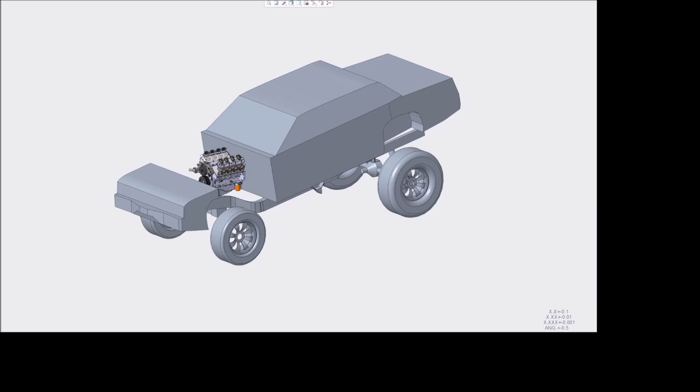Okay, so this is what I have been working on. I've got this 3D model of the Gigapony. Let me go ahead and hide this body here, the front end, so I'll hide the engine too.

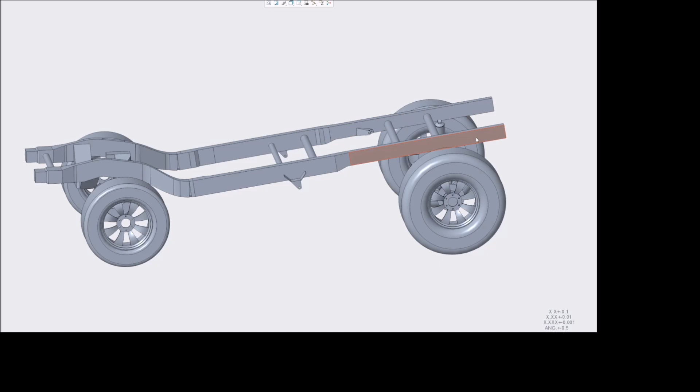So basically what I did, I found the body dimension diagrams, all the technical drawings for Chevy Silverados. I found the frame, modeled it, then copied what I did in real life in that frame modification video. I took out this second S curve and added about 14 inches to the rear end on both sides. So this frame in the model is pretty accurate to what is in my garage right now.

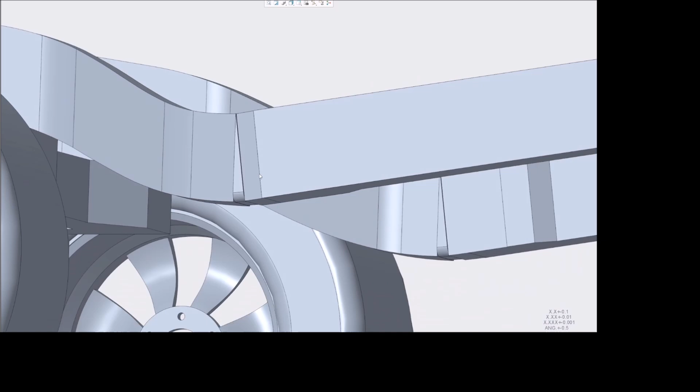The other thing I did was I cut the frame and gave it an 8-degree rake. You can see there's wedges in here. So I gave it its 8-degree rake, and now if we look at it this way, that's a pretty accurate depiction of its final height and rake, everything.

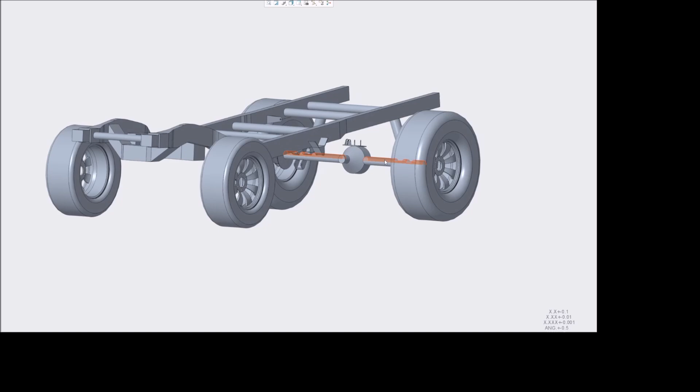Also, with the wheels and tires, those 46-inch tires I got, I did a lot of research on them, looking up people putting 46-inch military tires on Silverados, Fords, Dodges, whatever, and the consensus was don't do it unless you have heavy duty 1-ton axles and super heavy duty brakes. I agree, because that's a lot of weight you're spinning, a lot of stress on the rear end, the differential, the gears, the drive shaft, the transmission, everything. So I opted for 40-inch tires in the rear, which I got a pair of with a lot of tread for only $100.

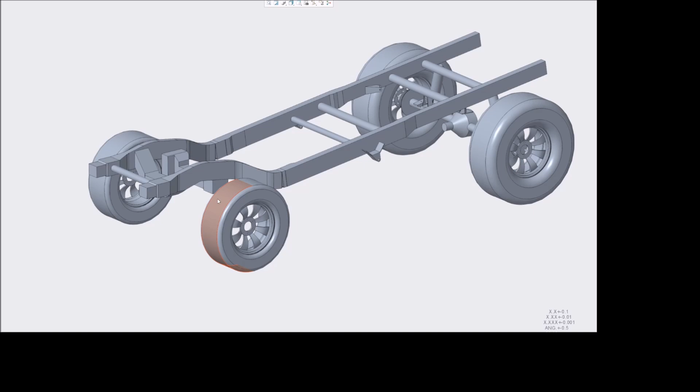And I went with 33s on the front because that's what I found behind a tire shop that said I could go rummage through their tires. I found a pair of 33s for free with a ton of tread left on them. And the wheels are 20s, 20 by 8.5.

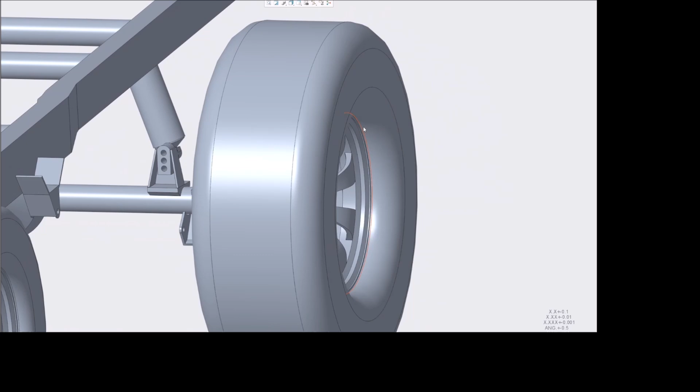You can see I modeled the tires to be representative of what they are in real life. So there's a bit of tire sidewall poking out, I guess, because it's a 20 by 8.5 wheel front and back, and the rear tire is 15.5 wide. The front tire is a 305, I believe. So, cutting it close, but it works. It holds air, the beads sealed just fine.

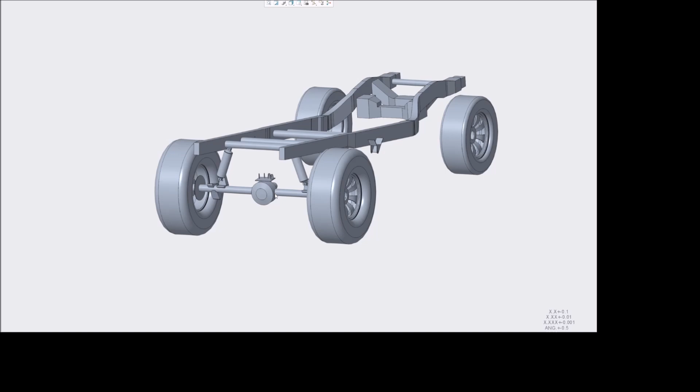I put balancing beads in each wheel, so all the wheels and tires are ready to go. And I've got the rear wheels on the rear end with all new brakes and spacers and everything. If you look, you can see the wheel is not set on the hub or axle - that's because there's a 2-inch gap here to represent a 2-inch spacer.

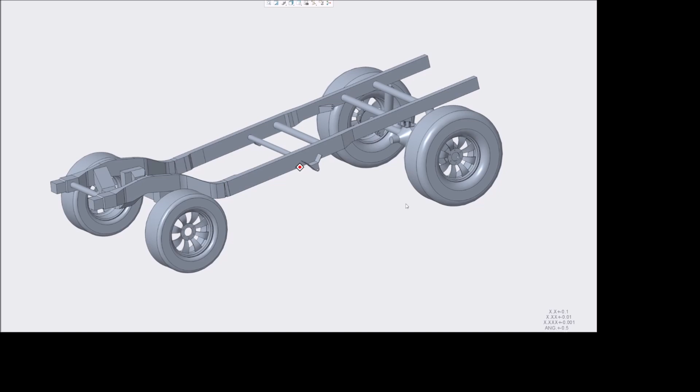So the reason I wanted to do this 3D model, the big reason, is for the rear suspension, one, and two, knowing where the body is going to sit along the frame and what I can expect.

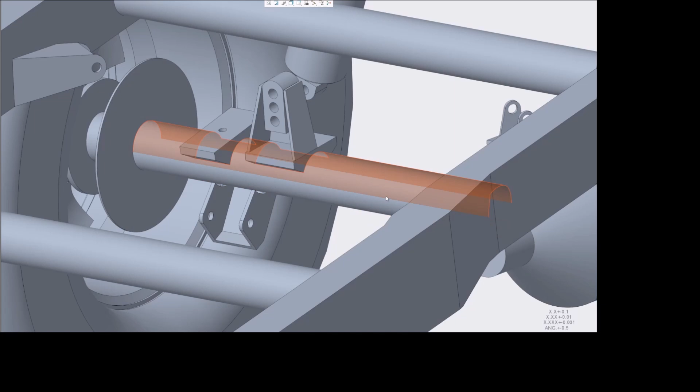So you can see down here on the rear end, I've got a shock tower, which normally welds onto an axle tube with the shock part going down on the backside. What I'm going to do is get one of those parts, which I already have in my shop on the bench, cut it so it's flat, and weld it to this little perch right here, because that would be a perfect spot to put a coilover.

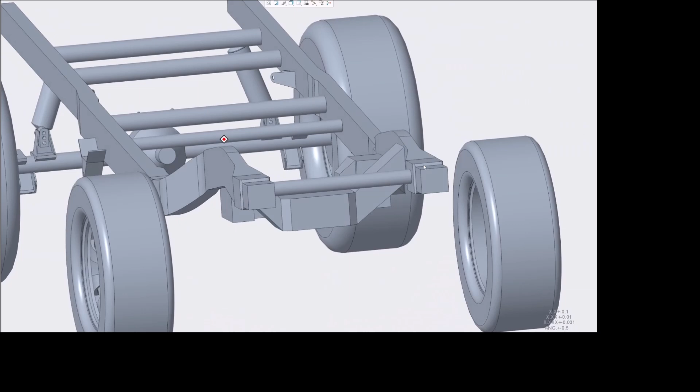All right, so I got that. These parts right here are actually from a company called Barnes 4-Wheel Drive. I found that they have a bunch of different styled and different sized link brackets and whatnot. So I found these - I think they're going to work pretty well.

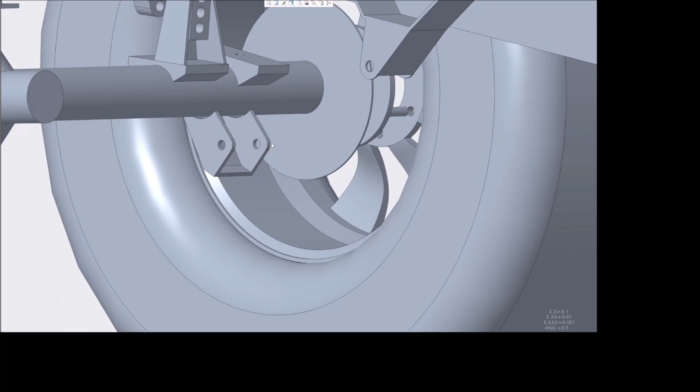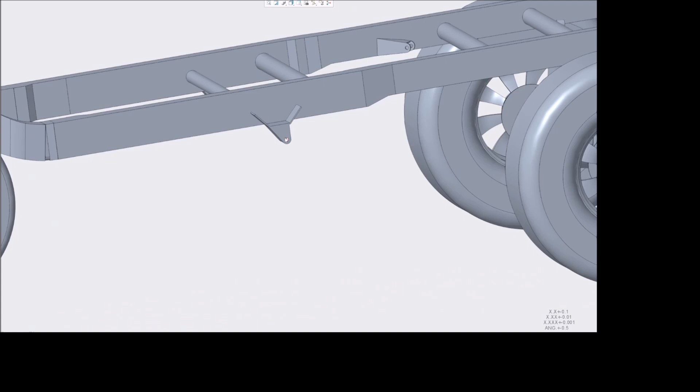Basically, where these brackets uncut should have gone down here, these are going to go. And then from these brackets on the bottom that I was just showing you, I'm going to run a link from it forward to this frame mounted link bracket, and I'll probably beef these brackets up once I get them on - add a triangular gusset in here, and maybe more metal on the top here, something like that.

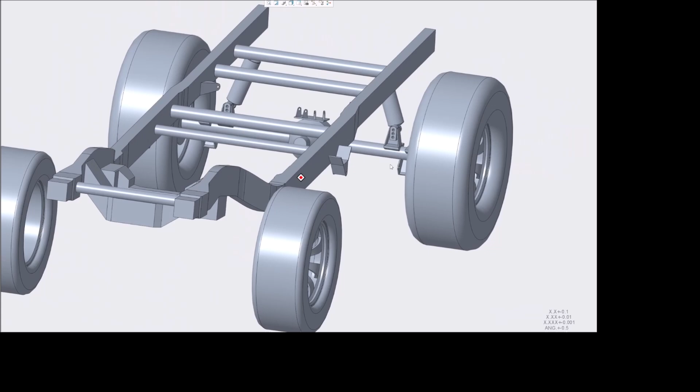And then on the top, these little brackets are also from Barnes 4-wheel drive right here. They're a quarter inch thick. They're, I think, 2 inches from center of the hole to here.

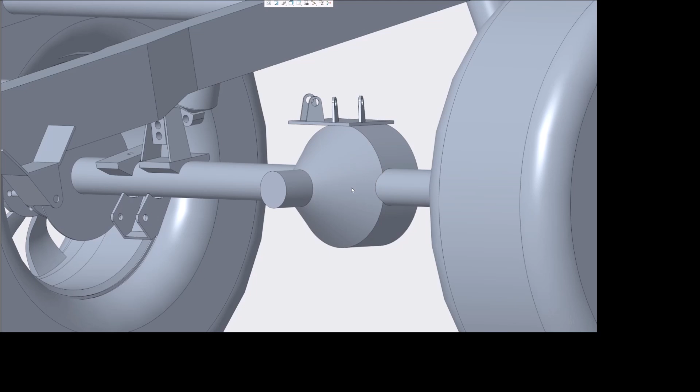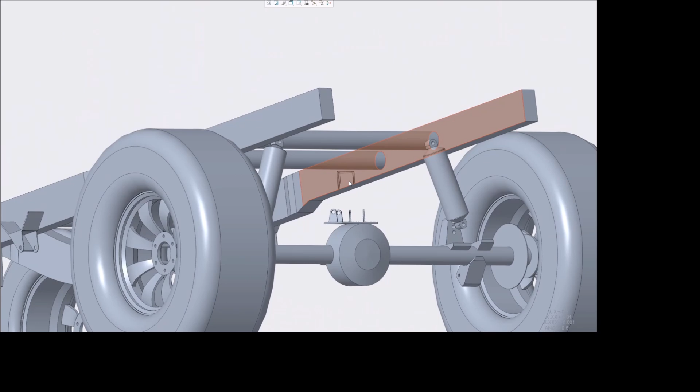This is a very crude representation of the pumpkin on that rear end, but the plan is to weld a flat plate to the top of it, and then I can weld my brackets to that plate. Then I can run links from here to the inner frame, and again on the other side here to the inner frame. That will give me my triangulated 4-link.

Now the reason I wanted to get the body on there is because on the Gigahorse, the rear wheels are actually centered under the rear wheel wells. So I wanted to get the body in place and then put the axle where it needed to be, to where it was under the wheel well. And then I can work on my 4-link stuff and do all that.

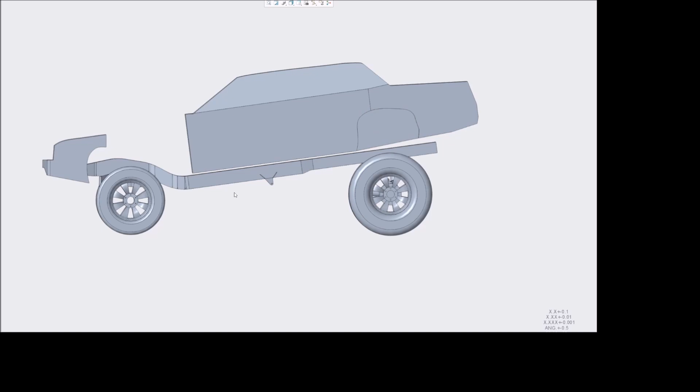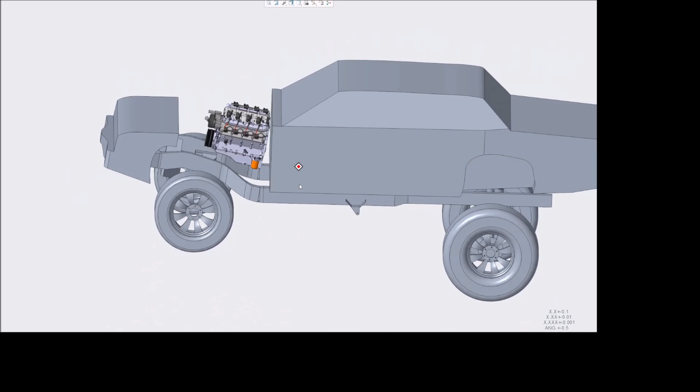And I wanted to put the engine in there too, because again, on the real Gigahorse, the engine actually sits behind the front axle. So I've got it behind the front axle. I've got tons of room for a nice big intercooler, a nice big radiator, tons of piping, intercooler piping, exhaust piping, whatever. And I have not modeled the transmission yet. I don't know if I'm actually going to model it, but whatever.

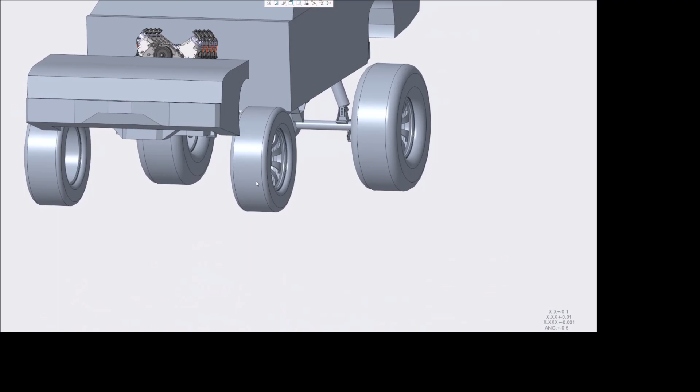So the plan is, now that I have all this, I'm going to do the front 6-inch lift, which this is representative of. And then I'm going to cut the frame and rake it up and put these wedges in there, and then put some strengthening plates on the outside and on the inside on both sides.

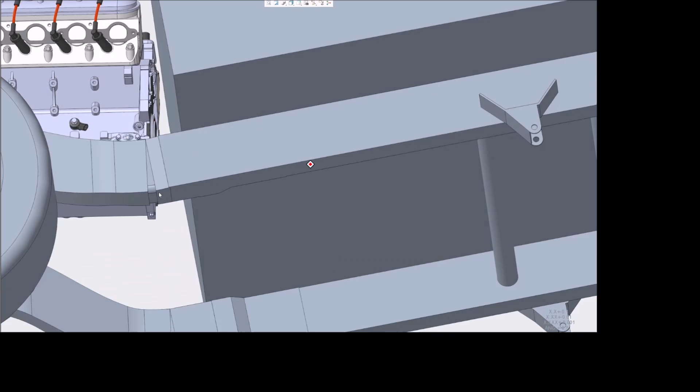So that'll be nice and strong. And maybe even on the bottom, put a flat plate, or not flat, but slightly bent plate on the bottom, just to help even more. And then I'll do all the rear suspension. I still have to order these coilovers, but they are modeled to be representative of the size of coilover that I want. I think it's 14-inch at quote ride height from eye to eye.

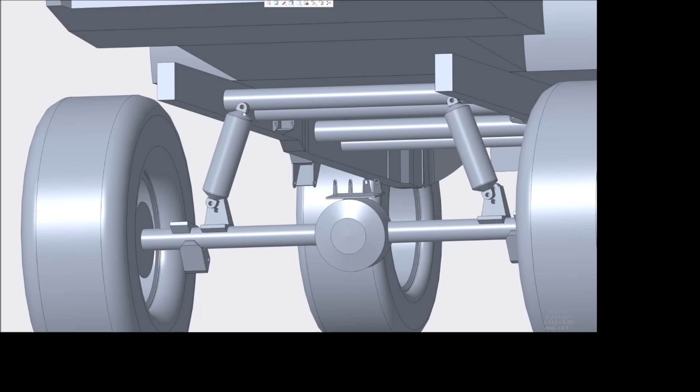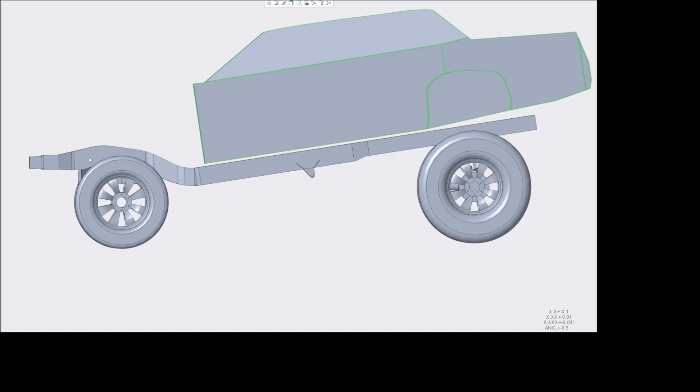And once the rear suspension is done and on the frame, and it's raked, and the front suspension is done, and it looks like this, except with a bar here, then my plan is to put the rear of the Deville on, and then put the engine and transmission in, then put the front of the Deville on, and just go from there.

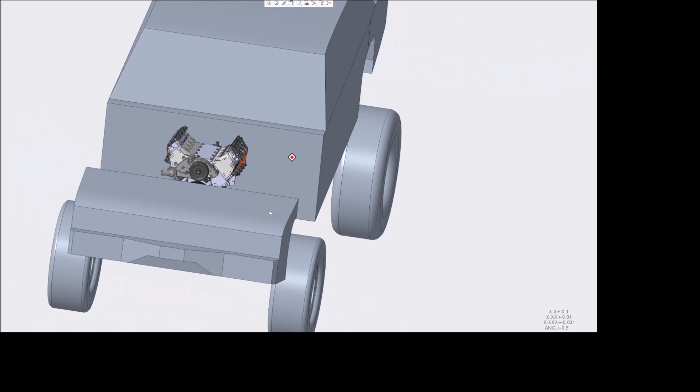I mean, exhaust piping, turbos, intercooler piping, all that stuff can easily be made to fit around these items, but I wanted to get the big ticket items installed and ready to go.

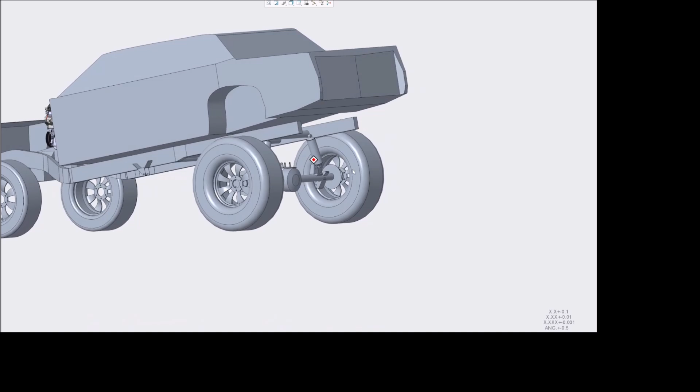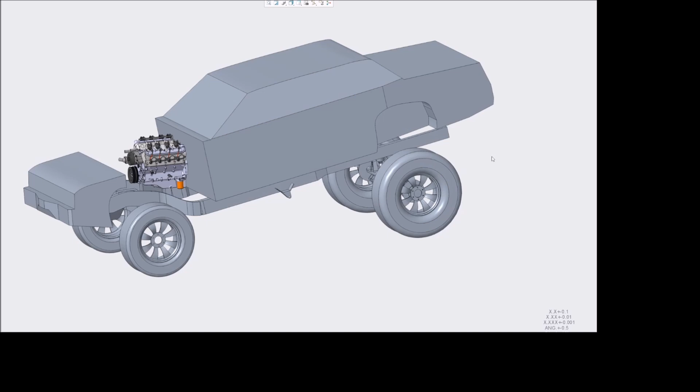And that way, obviously, like a gas tank, I can figure that out later. I'm not going to use the stock Silverado gas tank. I'll probably get like a 20-gallon aluminum fuel cell style gas tank, and hang it from in here, over the drive shaft maybe. I don't know. That's stuff that can be figured out later once I have the vehicle in real life, once I have it in this configuration and I can see exactly what I'm dealing with.

So yeah, there she is. So the Gigapony exists in the digital world. It's pretty awesome. I'm pretty excited.